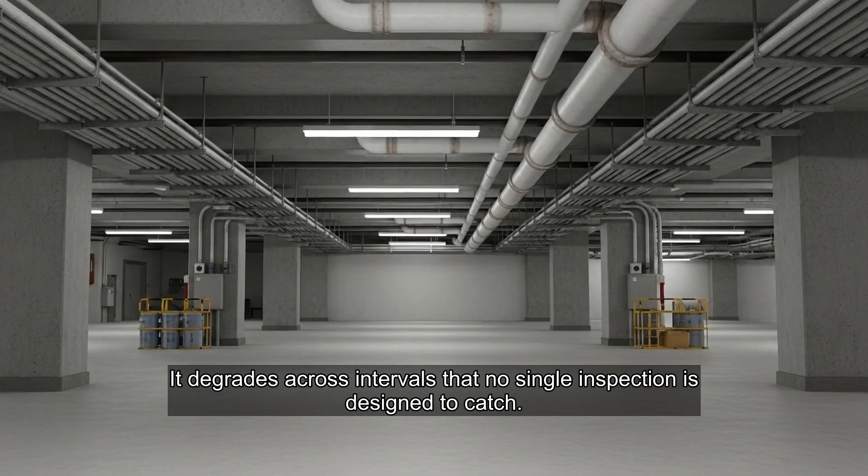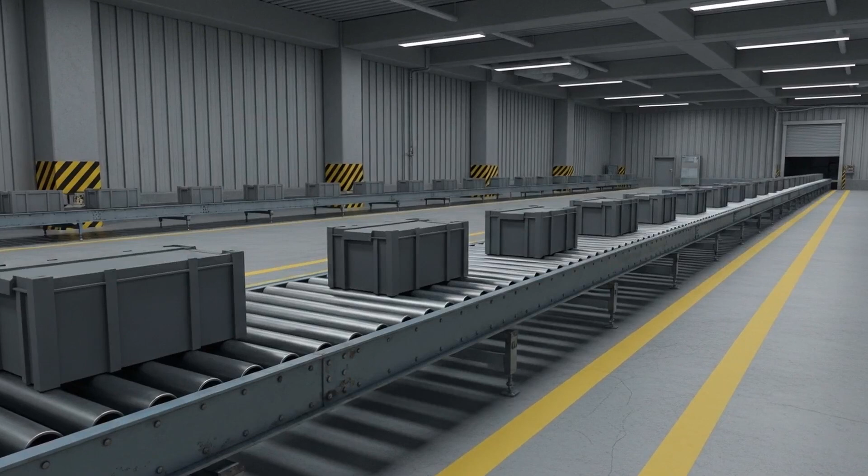Maintenance schedules are written around budget cycles. Budget cycles do not follow material fatigue. The gap between them is where failure waits. Procurement moves on annual timelines. Physical systems degrade on their own timelines. These two curves rarely intersect at the right moment.

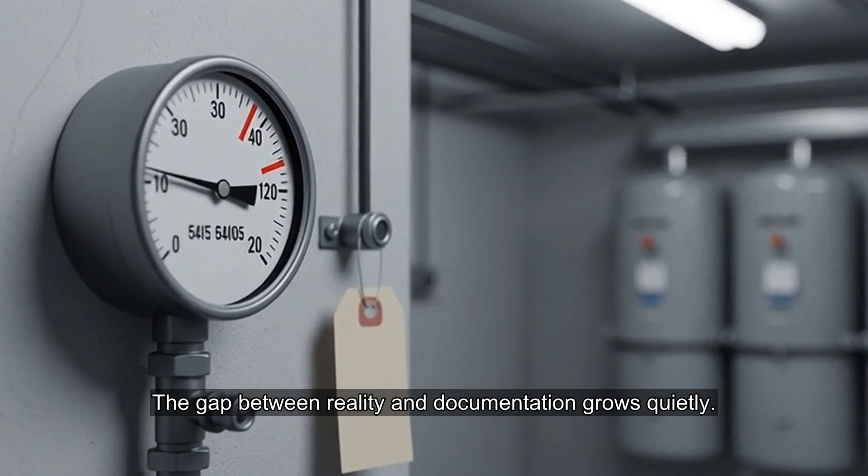A component that functions today is recorded as functioning. That record becomes the assumption for the next inspection cycle. When a threshold is passed, the record does not update automatically. The gap between reality and documentation grows quietly.

Institutions that pass audits regularly become confident in the audit as a proxy for actual condition. The audit does not measure what degrades between visits. A corridor that passes inspection is classified as maintained. Classification and condition are not the same measurement.

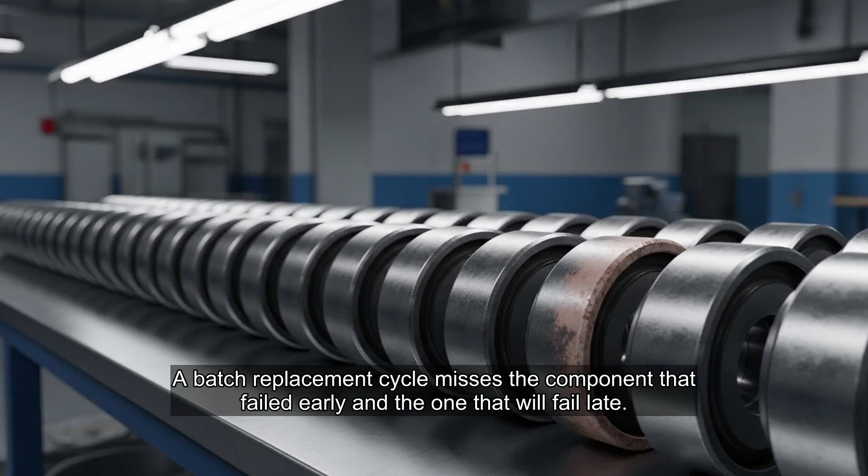The parts that wear fastest are usually the parts with the highest contact frequency. High use is rarely the trigger for early replacement. Components are often replaced in batches, not individually. A batch replacement cycle misses the component that failed early and the one that will fail late.

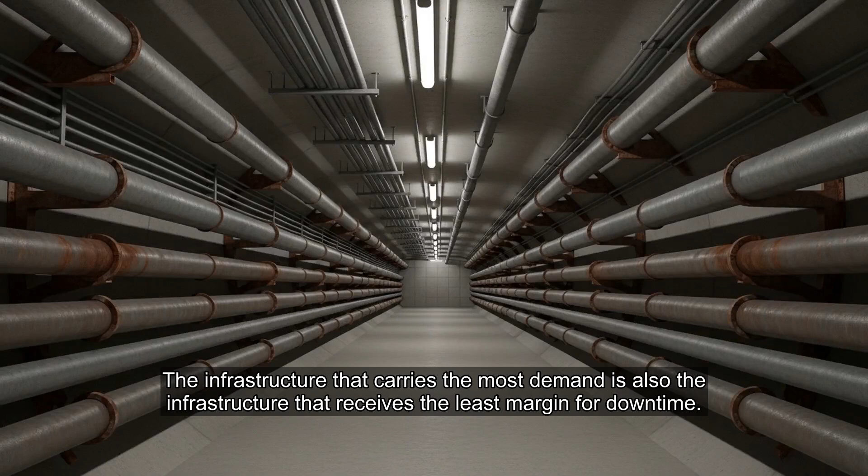Systems designed for average load behave correctly until demand concentrates. Concentration is not planned for, it is absorbed until absorption fails. The infrastructure that carries the most demand is also the infrastructure that receives the least margin for downtime. It cannot be taken offline to be fixed.

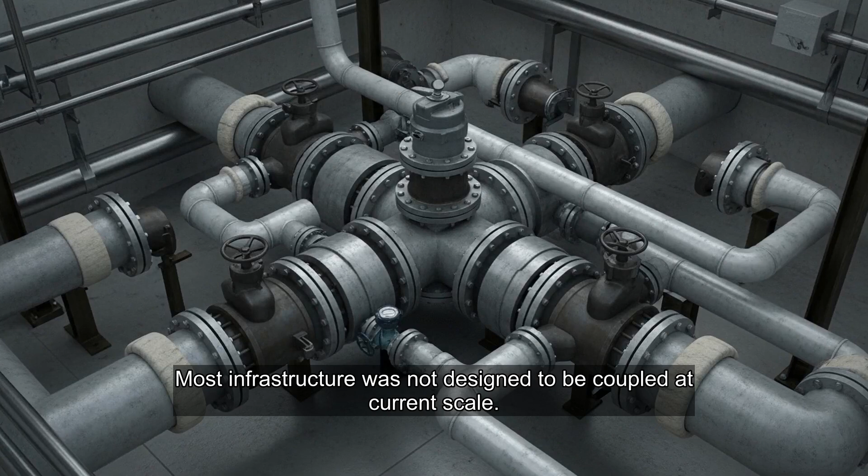A coupling failure is not a single part breaking. It is the moment one failure is transmitted to an adjacent system that was functioning correctly. Most infrastructure was not designed to be coupled at current scale. The coupling happened gradually, through use, not through planning. The record of each addition exists in separate documents. No single document contains the whole system as it currently exists.

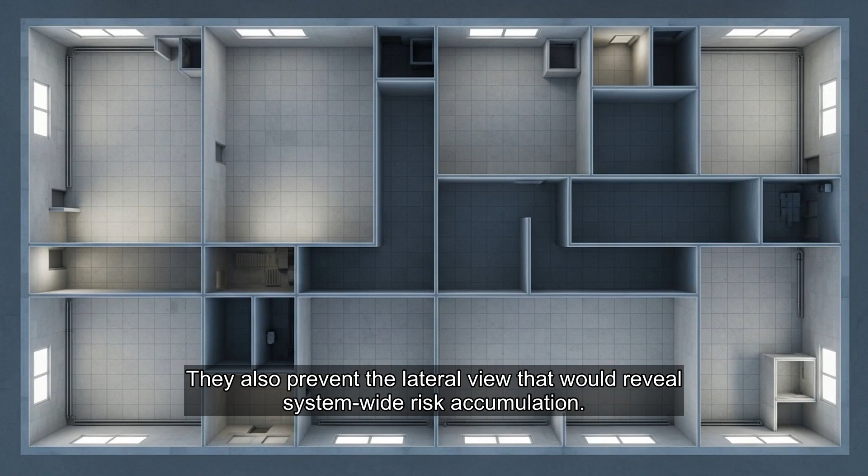The person responsible for a system section often knows less about adjacent sections than the system assumes they do. This is not negligence. It is a boundary condition built into the role. Role boundaries protect accountability. They also prevent the lateral view that would reveal system-wide risk accumulation.

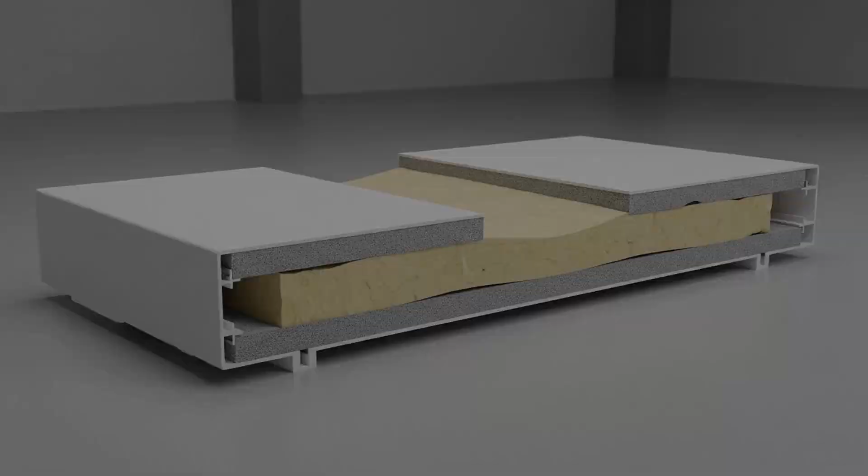Inspection visits are typically scheduled, not random. Systems that know when they will be observed behave differently from systems observed at random, even without human intent. The difference between the inspected surface and the operating interior is not deception. It is a structural gap that scheduled visibility cannot close. This pattern appears across infrastructure at every scale. The surface presented for review is rarely the surface under operational stress.

Deferred maintenance is not a decision made once. It is a decision renewed each cycle, each time the budget closes before the repair order opens. Each deferral moves the failure date forward. It does not cancel the failure. The deferred item accumulates interest in the form of accelerated degradation.

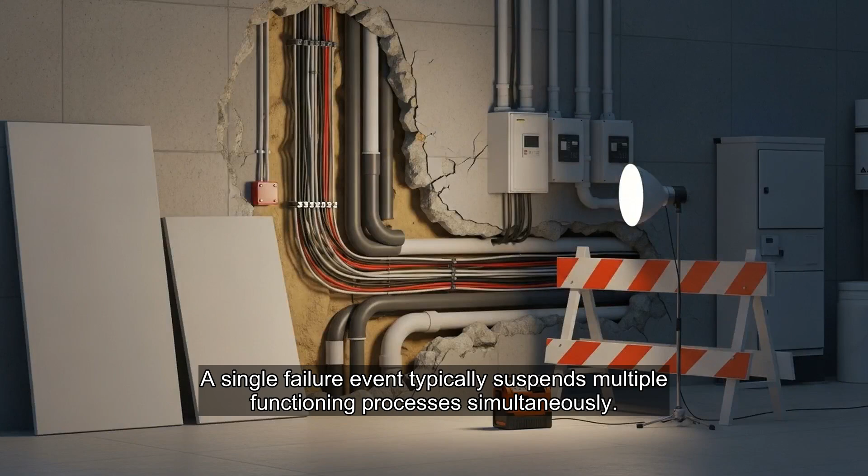The cost of repair at detection is a fraction of the cost of repair after failure. The system does not calculate this ratio until after the failure event. Emergency repair disrupts the systems adjacent to the one being fixed. A single failure event typically suspends multiple functioning processes simultaneously.

When emergency repairs are frequent enough, the system normalizes them. They are reclassified as operational events rather than signals of structural deficit. Normalization of emergency response is the point at which the system stops treating the symptom as information. The signal disappears into routine.

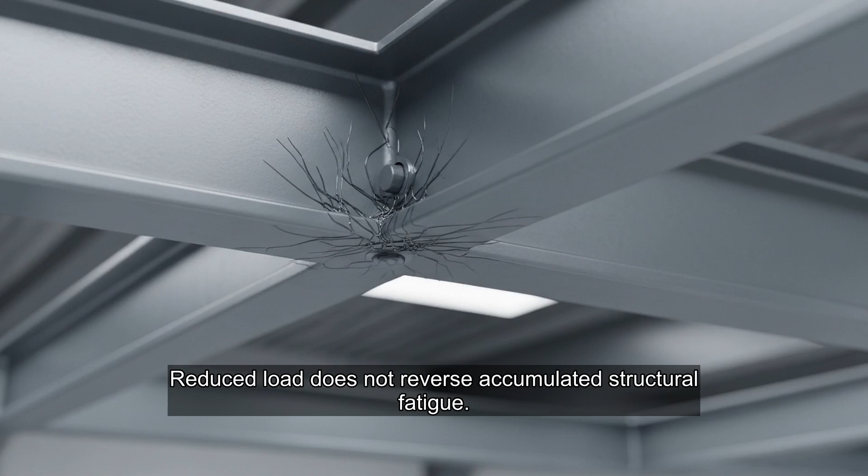The warehouse anchor returns at a different load state. The same shelves now carry less, but the structure below them has absorbed more cumulative stress than any single load event recorded. Reduced load does not reverse accumulated structural fatigue. The material remembers every cycle, even when the load above it decreases.

Fatigue is invisible in static inspection. It only becomes readable through measurement instruments or through failure. Most facilities use the second method. A gauge past its threshold is only information if someone is present to read it. Instruments that report to no active reader function as decoration.

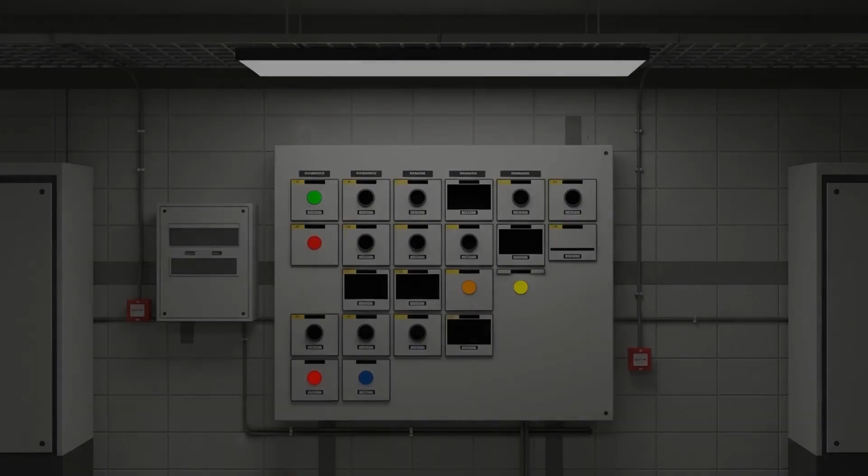Monitoring systems are maintained on the same budget cycles as the infrastructure they monitor. When funding tightens, sensor coverage contracts before the physical systems do. The gaps in sensor coverage are not mapped centrally. Each removal is a local decision. The cumulative blind spot is nobody's specific responsibility.

Blind spots compound. A failure in a zone without sensor coverage does not trigger an alert. The first record of its existence is the failure itself. Secondary damage follows the primary failure path.

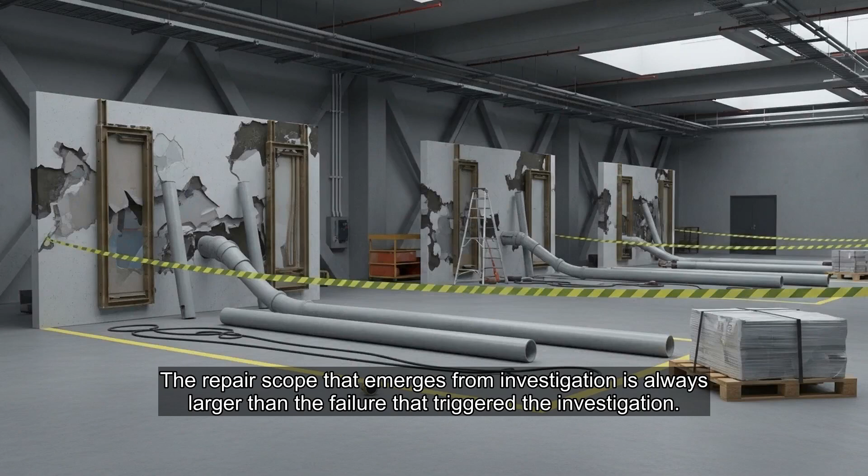Each adjacent material or system that absorbs the failure expands the repair scope by a factor the original estimate did not include. The repair scope that emerges from investigation is always larger than the failure that triggered the investigation. This is not an anomaly. It is the expected output of deferred maintenance.

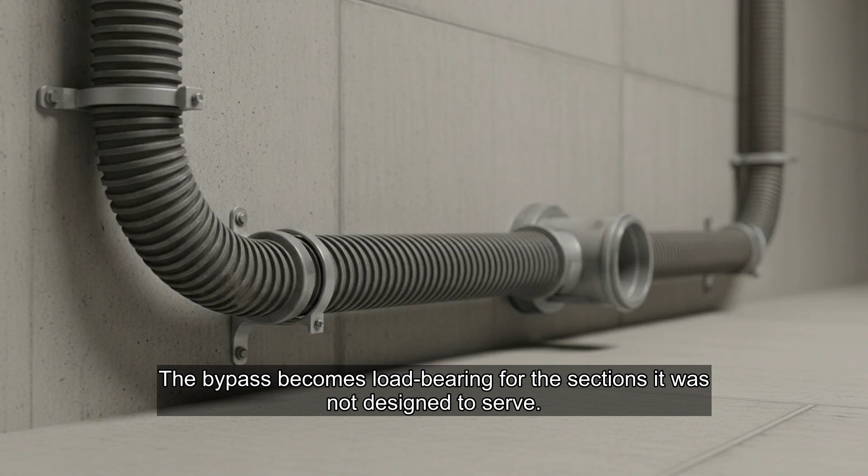Expanded repair scope delays facility restoration. Delayed restoration accelerates degradation in the sections adjacent to the repair zone, which continue to operate under stress during the shutdown period. The bypass becomes load-bearing for the sections it was not designed to serve.

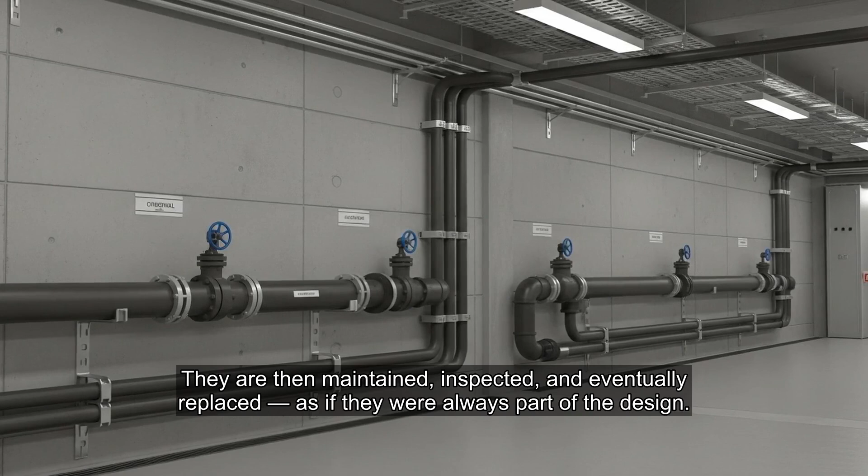Temporary becomes permanent at the moment the original route is assumed unavailable indefinitely. Workarounds that outlive their intended duration become infrastructure. They are then maintained, inspected, and eventually replaced, as if they were always part of the design.

The original failure that created the workaround is no longer referenced in any active document. The system has absorbed it as history, which means it can repeat without triggering a familiar response. If these patterns hold across one facility, they hold across the network that facility belongs to. The mechanism does not stop at building boundaries.

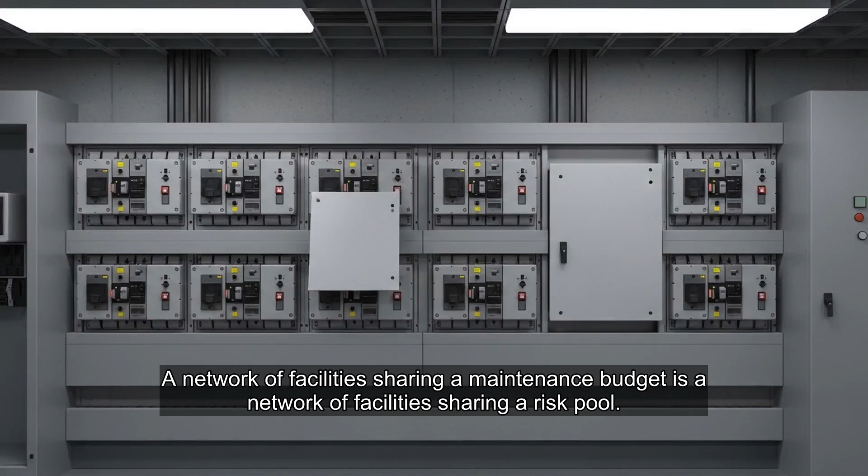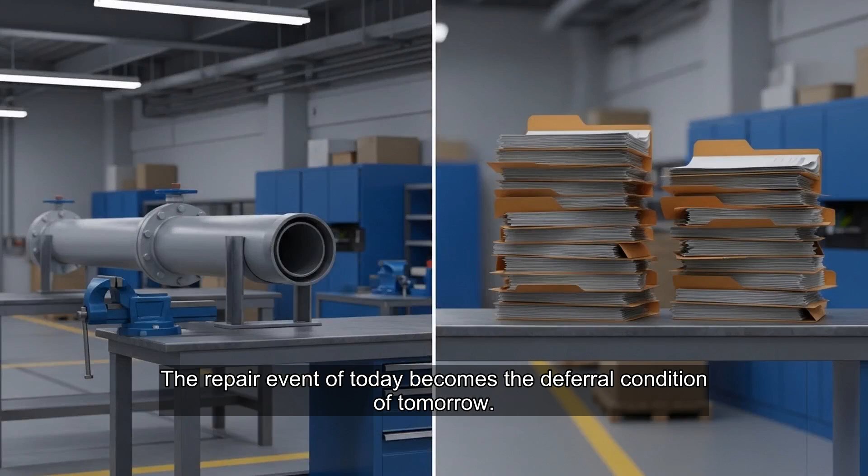A network of facilities sharing a maintenance budget is a network of facilities sharing a risk pool. A failure in one node applies cost pressure to the others immediately. Budget reallocation following a failure event reallocates away from preventive maintenance elsewhere in the network. The failure event generates the next deferred cycle. The loop is closed. The repair event of today becomes the deferral condition of tomorrow. The system reproduces its own fragility through the act of fixing itself.

The total deferred maintenance backlog across large infrastructure networks is measured in decades of accumulated cycles. It does not appear in any single facility record. The backlog is not hidden. It exists in audits, in facility reports, in procurement delays. What is absent is a system that aggregates it into a total condition assessment. Aggregation failure is structural, not administrative. No individual report is wrong. The problem is that no mechanism exists to combine them into a system-level view.

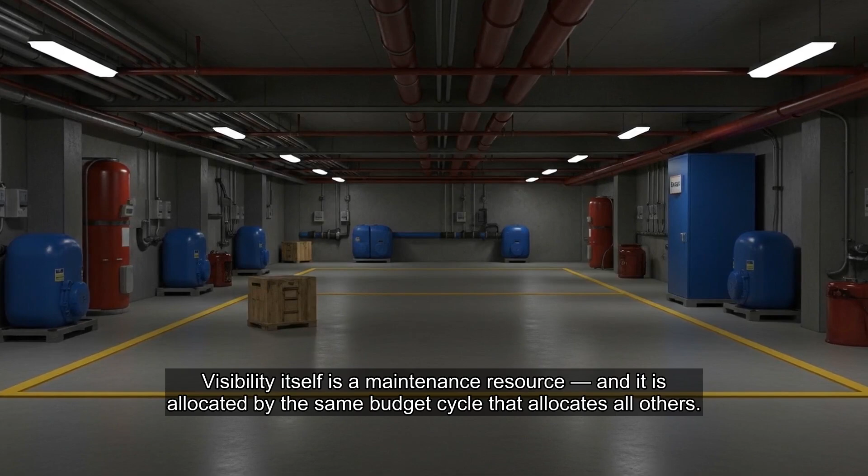Each facility that operates normally generates the assumption that the network is stable. Normal operation in visible nodes hides deterioration in the nodes that are not currently visible. Structural confidence is distributed unevenly. The parts of a network that are monitored generate confidence about the parts that are not. This is an inference that the system does not validate. Risk in infrastructure networks concentrates in the least visible sections. Visibility itself is a maintenance resource, and it is allocated by the same budget cycle that allocates all others.

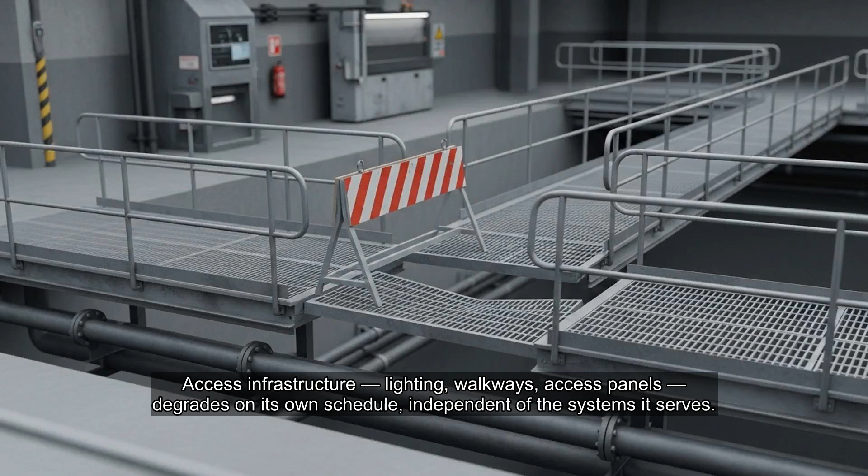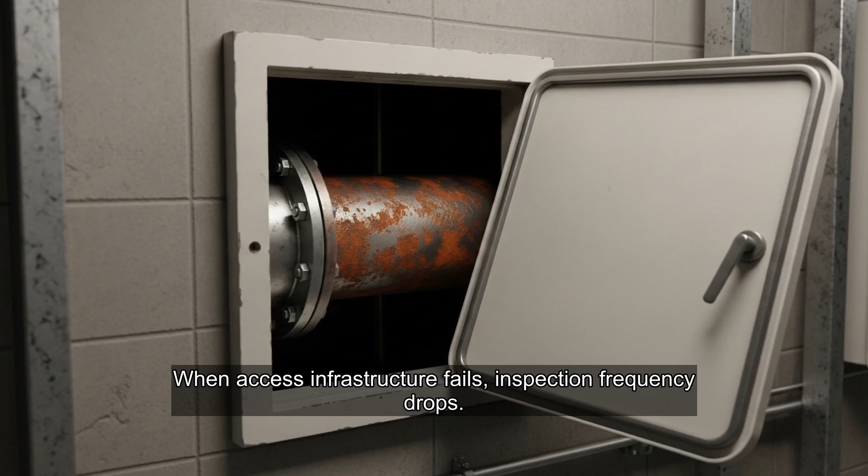A system cannot be inspected if it cannot be accessed. Access infrastructure, lighting, walkways, access panels, degrades on its own schedule, independent of the systems it serves. When access infrastructure fails, inspection frequency drops. When inspection frequency drops, the underlying system deteriorates faster between the intervals that remain. The section that cannot be accessed is the section that will produce the unscheduled failure. The physical barrier between inspector and system is sufficient to produce the outcome.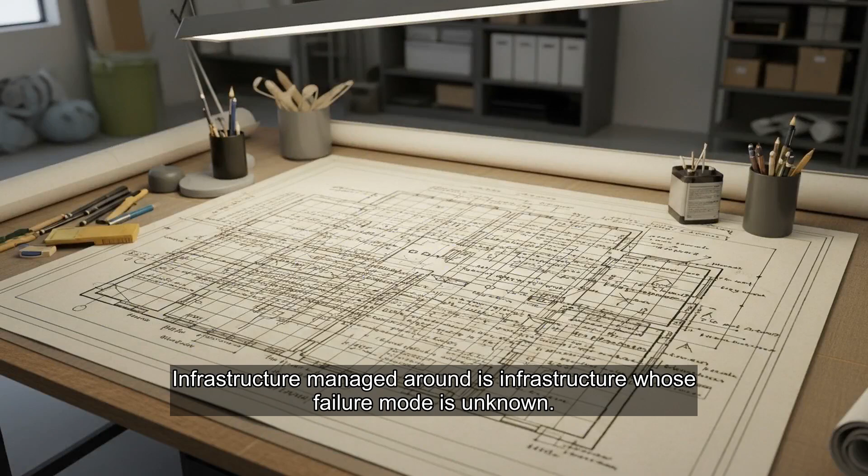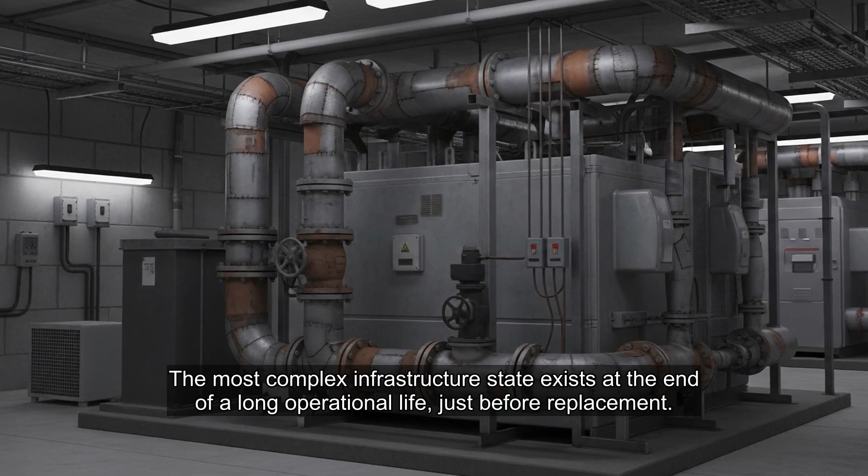Layered infrastructure from multiple generations of use cannot be fully replaced without suspending operations. So it is not replaced. It is managed around. Infrastructure managed around is infrastructure whose failure mode is unknown. The workarounds create a system architecture that no engineer designed and no model predicts. The most complex infrastructure state exists at the end of a long operational life, just before replacement. This is also the state with the highest failure probability and the least accurate documentation.

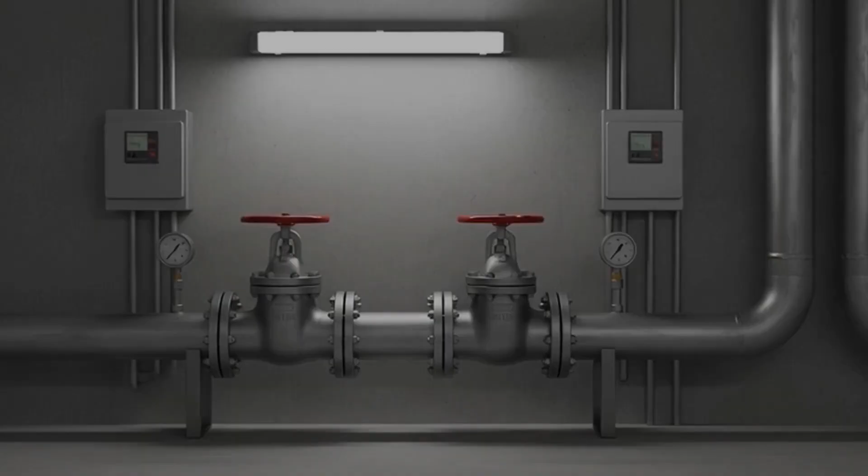End-of-life infrastructure is replaced according to budget cycles, not condition cycles. The replacement decision arrives on schedule, not at the moment of highest risk, but at the moment funds become available. Replacement does not reset the risk profile immediately. Adjacent systems that were calibrated to the old equipment's behavior require recalibration. The period of highest risk is the switchover period.

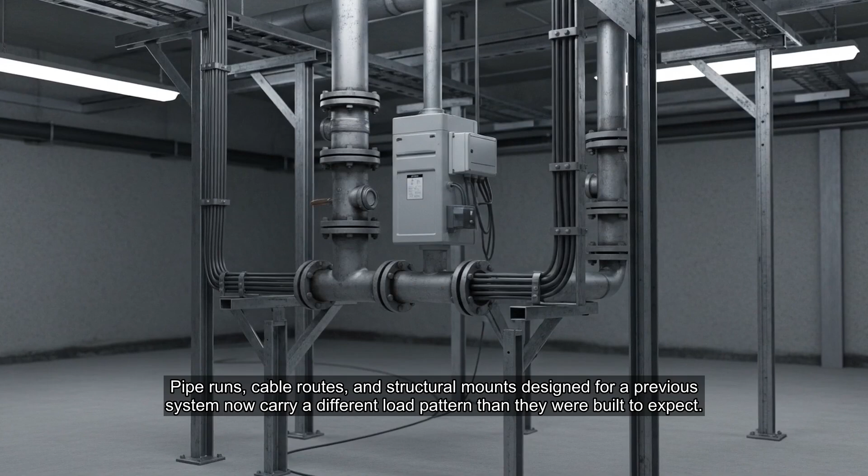New equipment inherits the physical environment of old equipment. Pipe runs, cable routes, and structural mounts designed for a previous system now carry a different load pattern than they were built to expect. The replacement cycle renews the equipment. It does not renew the environment the equipment operates in. The next maintenance cycle begins against a partially legacy substrate. The next budget cycle opens with the new equipment classified as current. The surrounding legacy infrastructure is classified as serviceable. Both classifications are accurate. Neither is sufficient.

The inspection form was designed when the system was first installed. The form has not changed. The system has. What the form cannot ask, the inspection cannot find. Documentation systems lag behind physical systems universally. The lag is not a flaw. It is a structural property of institutions that update records through periodic review rather than continuous sensing. The gap between the schematic and the facility is the space in which unknown failure modes develop. This gap exists in every facility of sufficient age and sufficient history of modification.

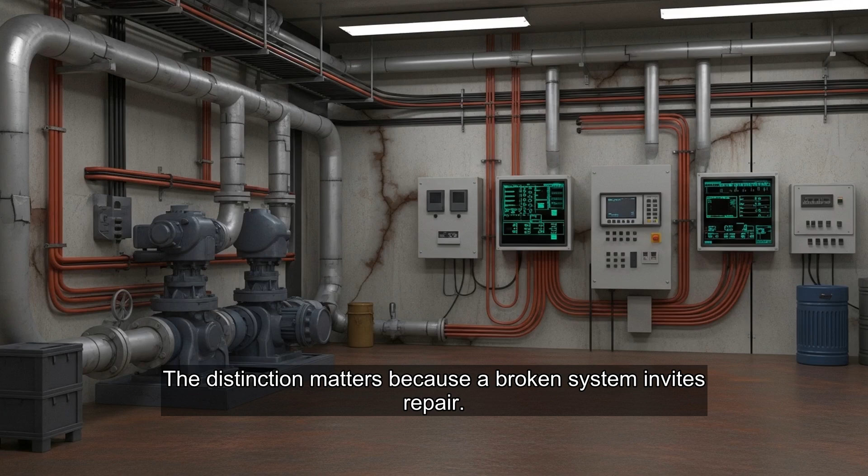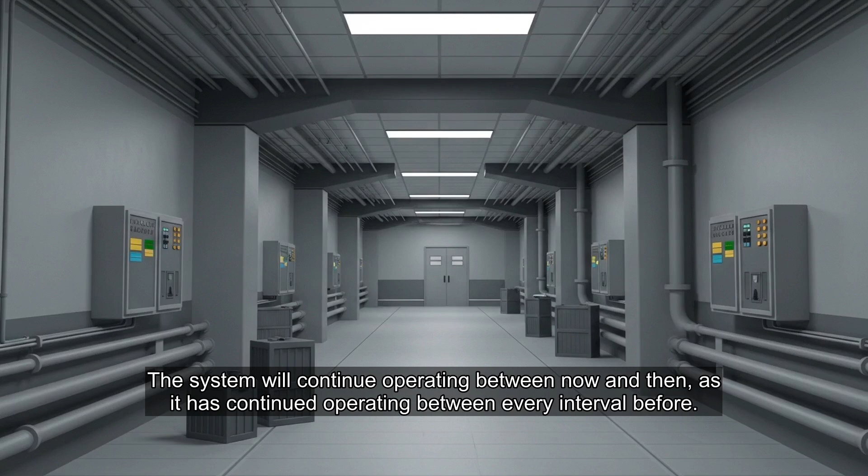This is not a problem that emerges from negligence at any single point. It is what infrastructure looks like after decades of individually reasonable decisions, each made within the constraints that existed at the time it was made. The system is not broken. It is operating exactly as its accumulated constraints allow. The distinction matters because a broken system invites repair. A constrained system continues. The maintenance schedule for this facility is set. The next inspection is on the calendar. The system will continue operating between now and then, as it has continued operating between every interval before.